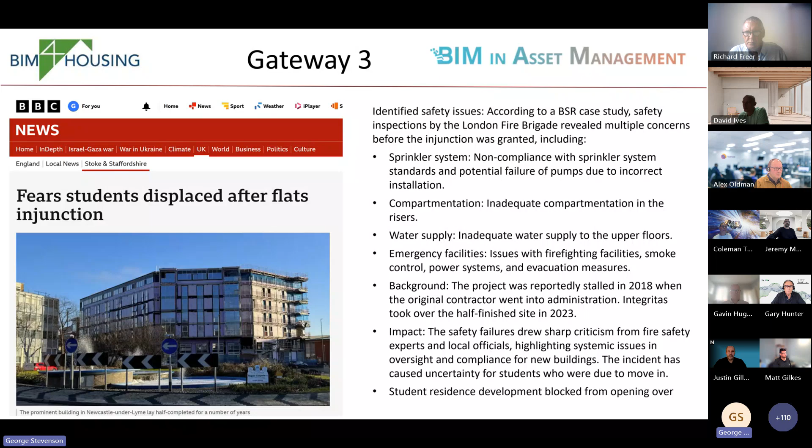If nothing else, because it's actually leading to a lot of projects being delayed because of missing or flawed information. And the Gateway 3 is even more looming. I think most people will have seen that this one is one where I imagine the finances on this are going to be very tricky.

So what we've got is BIM for Housing, but you're in a BIM in Asset Management meeting now, which is a far more focused area of the better information management process.

One of the challenges we're dealing with is that the government and the regulators haven't provided any explicit requirements for information, and they're not likely to either. So what we've got to do is rely on the industry's expertise to interpret what's needed and then recommend that to clients and supply chains.

The difficulty is that we've got different experts who interpret the guidance in different ways, and they may have different views as to what the outcomes should be. Therefore they're giving guidance to their customers, which then goes through to the supply chain, which can cause real challenges because they'll have different people saying that they need to provide different information on the same thing.

Part of the process of the Golden Thread group that we've got is to act as, if you like, an intelligent client, and to be able to produce reusable data libraries.

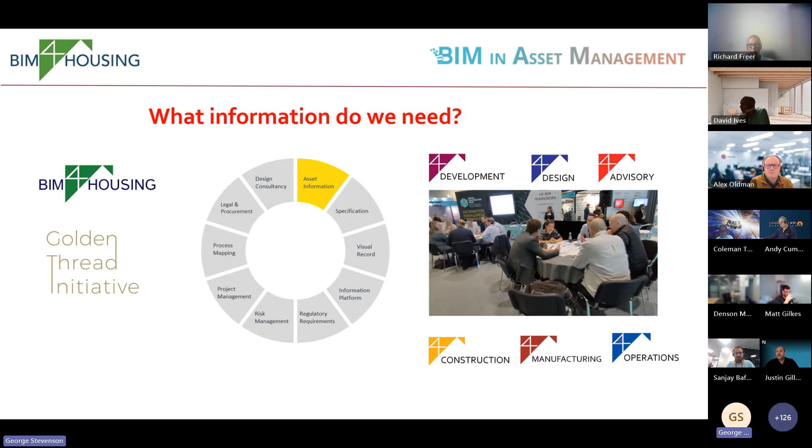We're doing them on Teams. So if you're interested in that, then please put safety critical assets down in the chat and we'll let you know about what's happening there.

What came out from that work was different stakeholders need different information for different purposes. So what we've done is gather together as much information as we could from those experts, and we've published it on the BIM for Housing website. We've got detailed information on a dozen or so safety critical assets.

One of the things we agreed yesterday is we're going to do one on lifts next. So if anybody's interested in lifts, there's going to be a working group or work stream set up for lifts over the next few weeks.

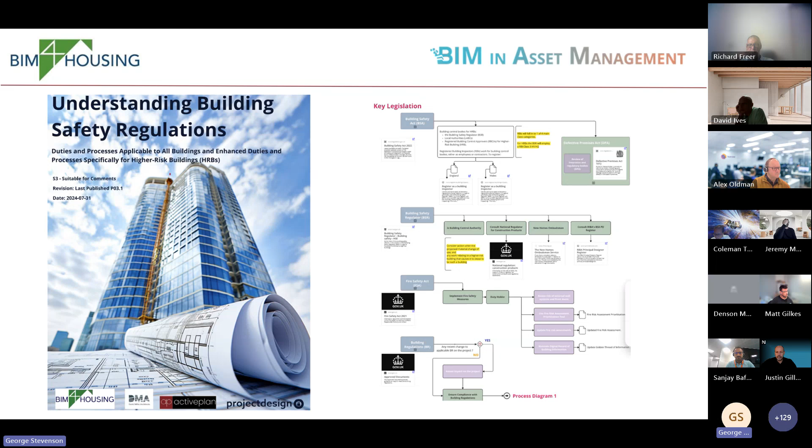What we've also got is a Miro board where a few of the team have put this together. They've looked at their interpretation collaboratively of the legislation, and you can access it there. If you aren't on that list, just put Miro board into the chat and we'll get you on it, we'll give you access to it.

We've also got some specific work streams that have been looking at, for example, something very focused like fire door inspections.

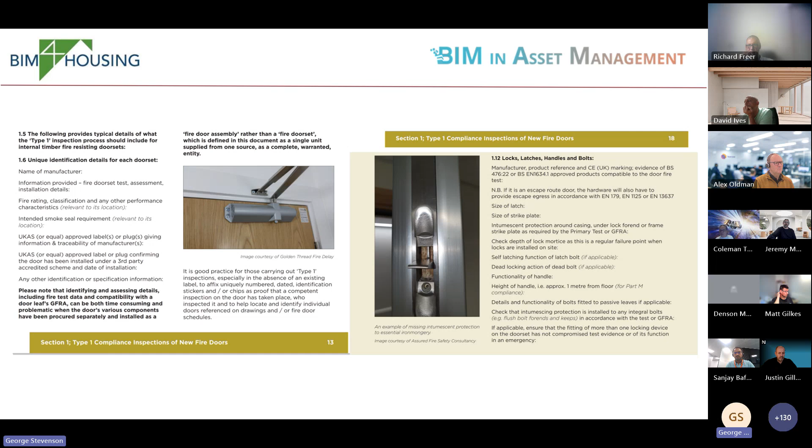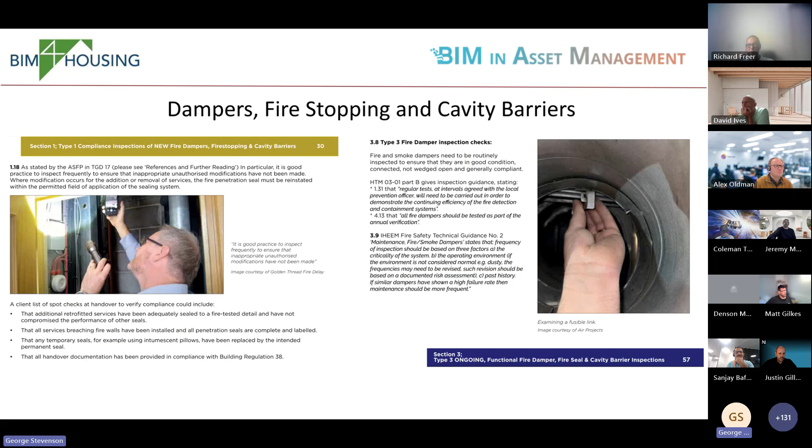And we've built on stuff that came out of the NHS, and we think it's quite a good guidance document. And we're just releasing one on fire dampers and fire stopping, which is of a similar sort of quality. We're doing that with a company called Golden Thread Fire Delay, who have authored a lot of this stuff. And importantly, we've got lots of different software companies involved in the community. What we really want to do is to get those glued together so that we've got something that's all sort of joined up.

So I'll hand back to you, Richard, on that. You're on mute, Richard.

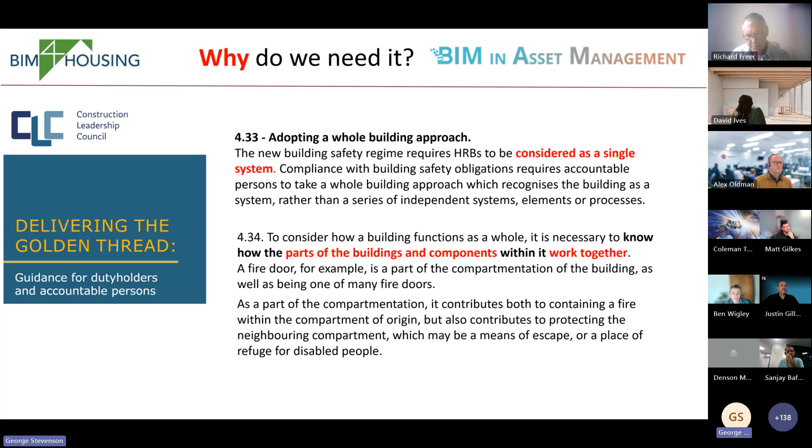And understanding needs. So, for example, having a common way of interpreting what the golden thread actually means. One of the key things that we've identified from the experts is that you really need to look at the building as a complete system, made up of lots of systems, and they all need to be able to work together. So I won't apologize for the fact that I'm showing this many times because I think it's important that we get this over.

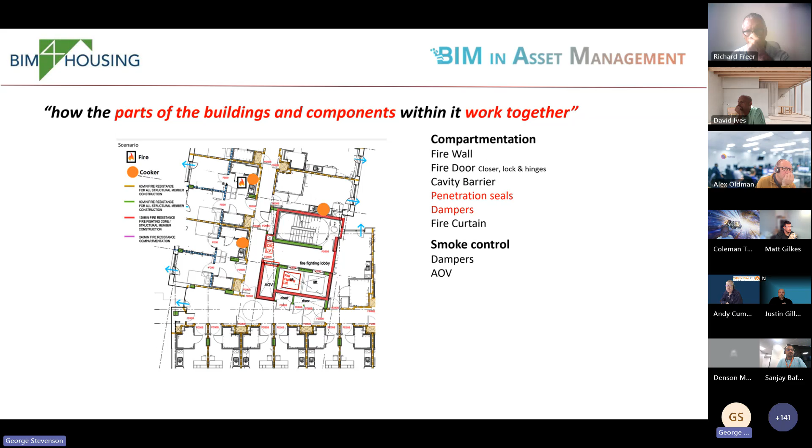That if a fire breaks out in a kitchen, we need to ensure that the smoke that maybe is generated from that doesn't get into that stairwell. And the way in which that's done is through good quality compartmentation, which means not just whether the fire doors are good, but also the whole of the compartment needs to be robust. So, if, for example, penetration seals aren't robust and in place, then you may as well not have bothered. So we've got smoke control systems, detection systems, and all of those need to be able to work together.

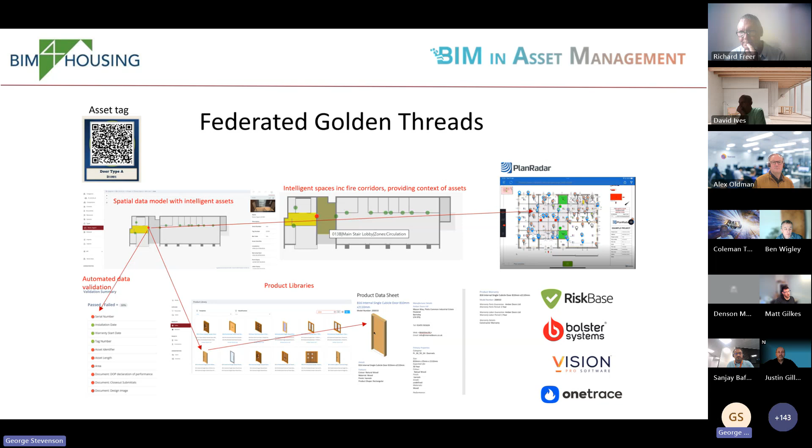So from a software point of view, we need to make sure that if there's a BIM model, the information that's come through from that in terms of what's actually been installed, what product's been installed, and also what's that door doing, it's part of a compartment. And then if there's a range of different software applications being used to do inspections, rather than just recording the inspection, we need it to tie back to the individual asset. So we can make sure that it's all coherent. And the various different software companies are now working with us to achieve that goal.

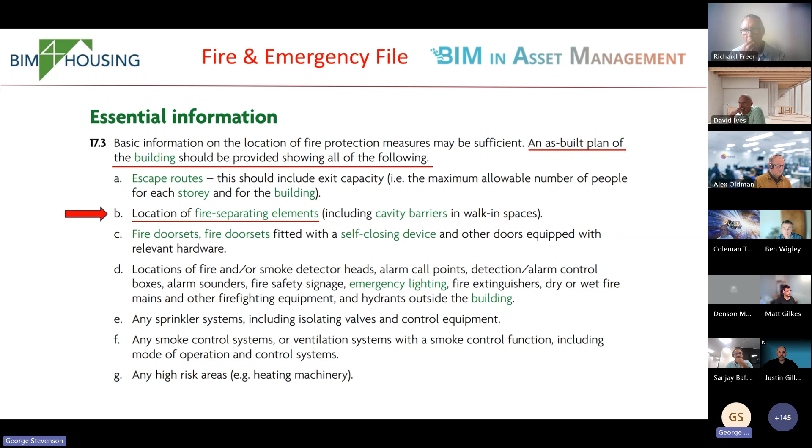What's often also the case is that clients don't understand fully what their responsibilities are under the fire and emergency file. So, for example, we need to ensure that they understand, and this is part of an educational exercise, I think, that they need to have a plan that indicates where all of the fire critical assets are.

And also, there's now a duty, a legal requirement that's actually been around for a long time, but it's now being more rigorously questioned and enforced, that a client needs to be able to say that they've got all the information that they need at handover to keep the building safe. And the same with the contractors. The contractors have to guarantee that they've provided all that information. Now, the irony with that is that it's probably coming from half a dozen different sources, and it may not be glued together.

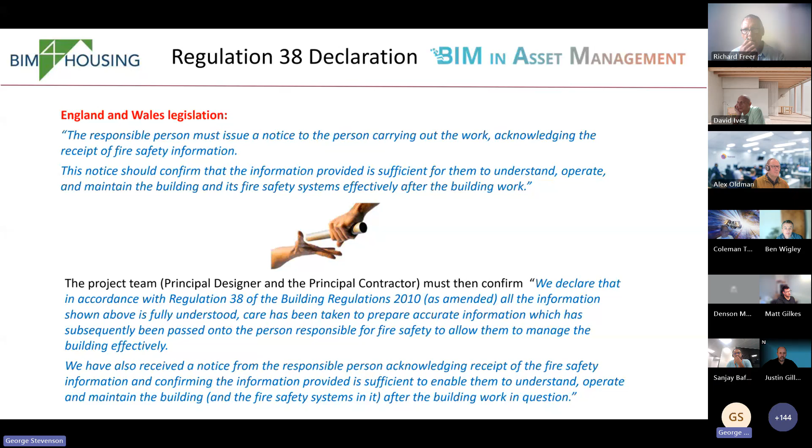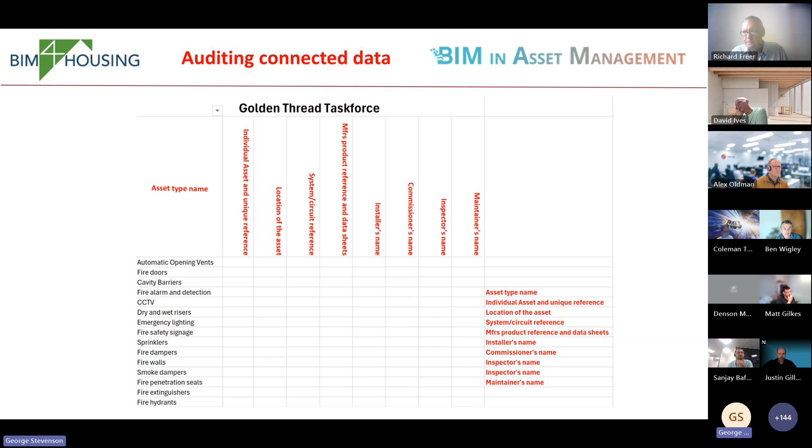So that's the sort of thing that we're trying to work to. And we've come up with this way of maybe doing a simple check to make sure that you've got the right information just at a basic level of what the asset is, which system it's part of, what it's doing, what product's been used. So this is one example of that, because what we're trying to do with the Golden Thread Task Force is have evidence of, bring together things that work.

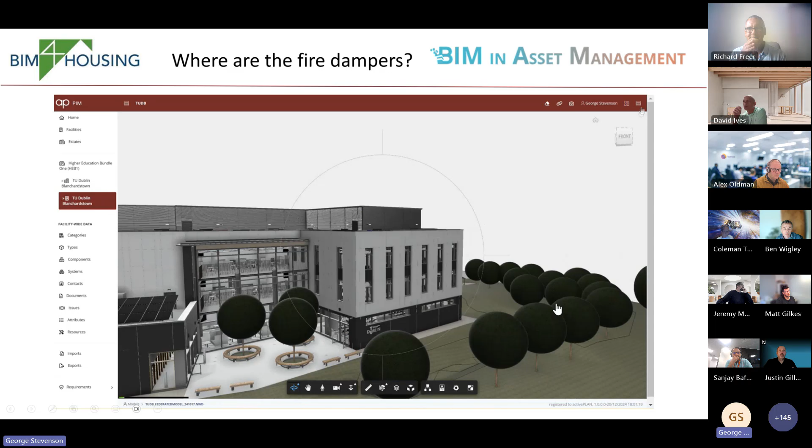So this, for example, the fire damper: if there's a fire, this duct, I understand, could collapse, and unless there's a breakaway joint, it could pull that out of the wall. So what we're doing here, we've got a range of different software applications all glued together. And therefore, what we're doing is tying together the locational information, also the product information, the installation information, so that that can be validated and checked in a more joined up way.

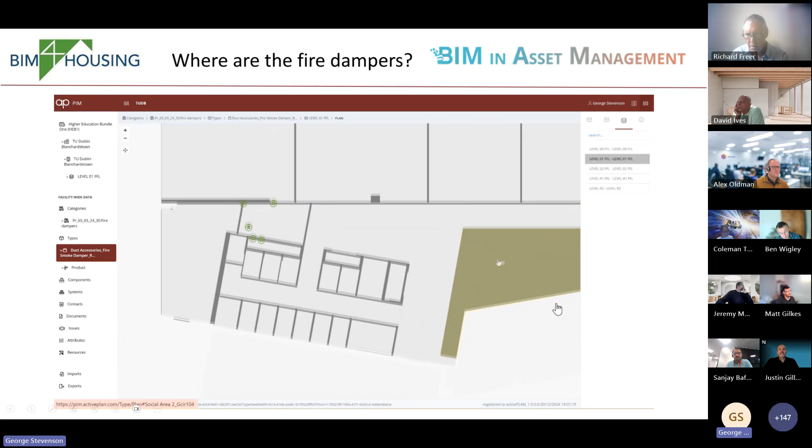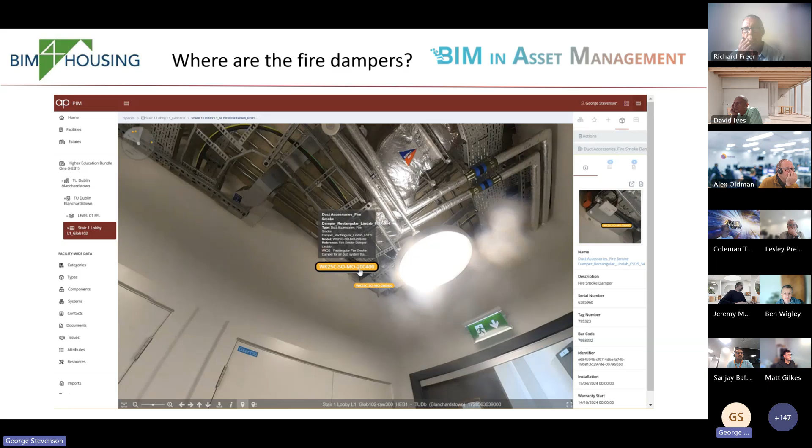So this is one example of a golden thread working between a range of different software applications and also service providers. So in this particular case, we've got the dampers located in the wall, so you can see which wall they're in. The wall can be checked to make sure it's got the right status, it's the right substrate for that particular damper. But also the 360 photographs can then automatically take you to that particular asset. And it's that sort of joined up work that we think is going to make a real difference.

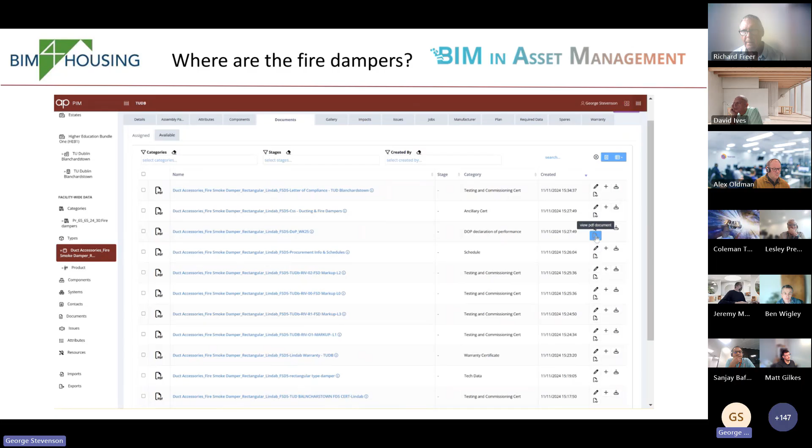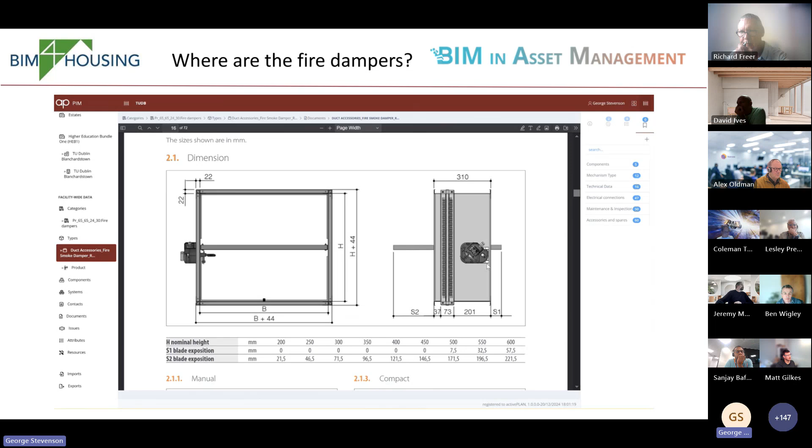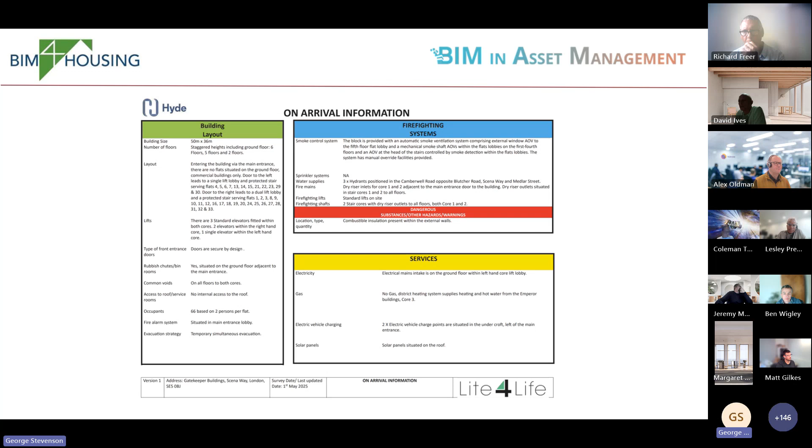And finally, this is also connecting back to the documentation. So part of the golden thread is obviously information about the specification and the product information, but also a lot of information can get buried in documents. There's also some good examples here that we're collecting that people are doing. So there's now a requirement, as well as the secure information box, there's a need for an emergency response plan. So this is one example of that, where a company called Lite4Life have been doing this for their clients. So this is the information that is being presented, which I think is particularly strong from that point of view.

And what we're then doing is moving on to collaborative projects. So what we want to do is encourage people to bring together the information that they've got on existing projects. So here, for example, gathering together all the Regulation 38 documentation, spatial models, and then maybe, if appropriate, bring in digital twins, but don't start with the digital twin, start with the basics.

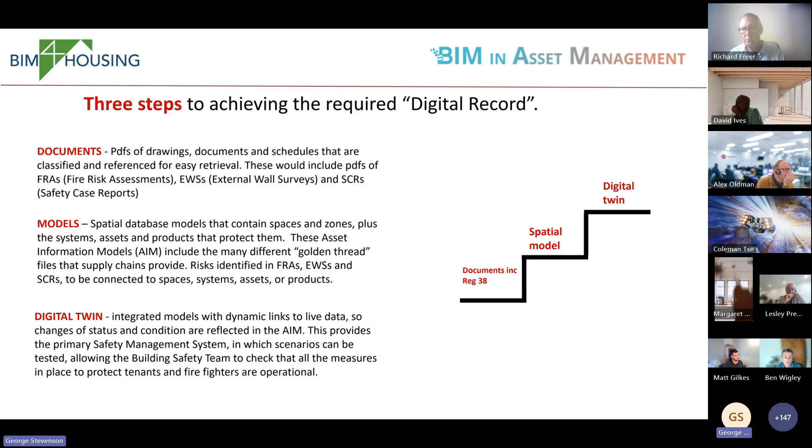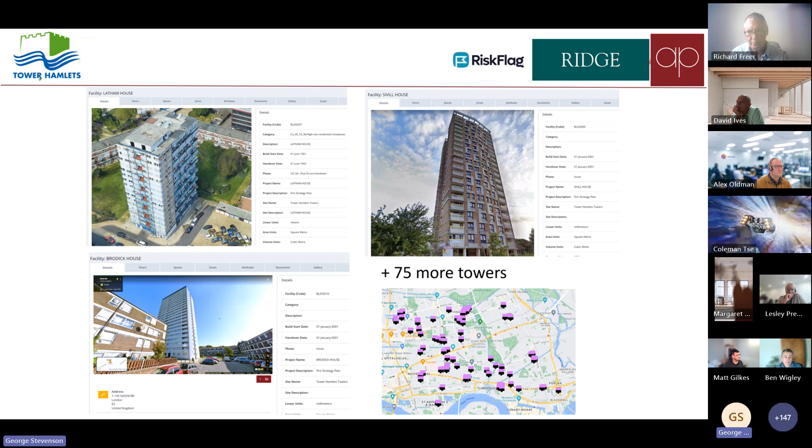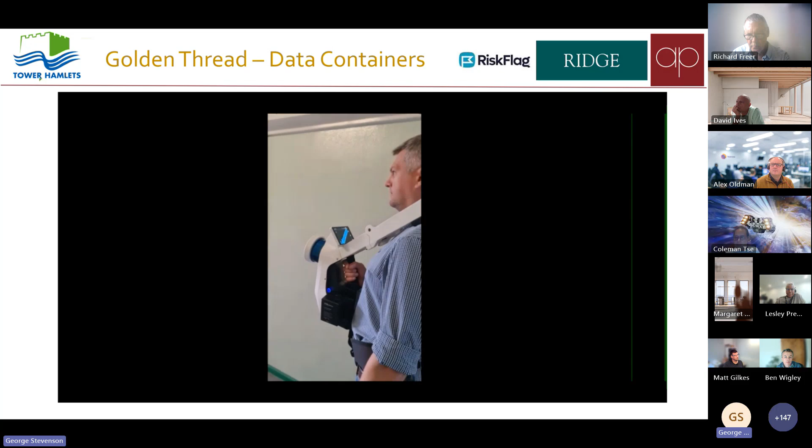This is one that Ridge are leading on at the moment. This is for Tower Hamlets, and they're doing scans of the buildings using LiDAR. This is taking a couple of years to achieve, and there's probably another 12 months to go with it. But they've got a plan, and within the budget that the council can afford, it means that they're able to do this in a gradual way, and then use that to actually go and identify, for example, where the compartments are, and also what assets are in place that are actually managing that process.

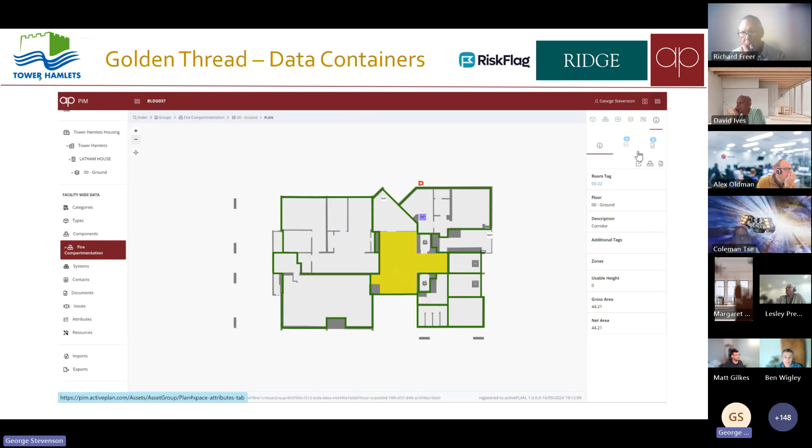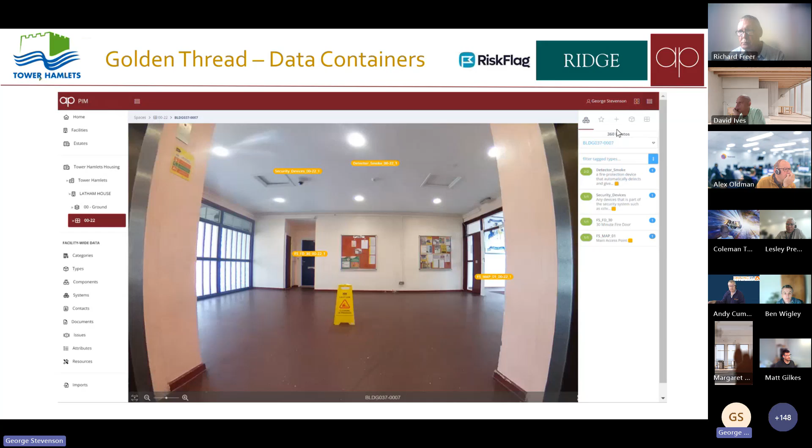So the use of 360 photographs is a good way for us to work collaboratively and open this out to the wider market of experts and get experts to actually provide that information. So in this case, in this lobby area, it means that you can have maybe a specialist in lifts. I think we're going to have several of those joining the group now. So it means that we've got that as an asset list that everybody can work to. And the next project that we're doing with them

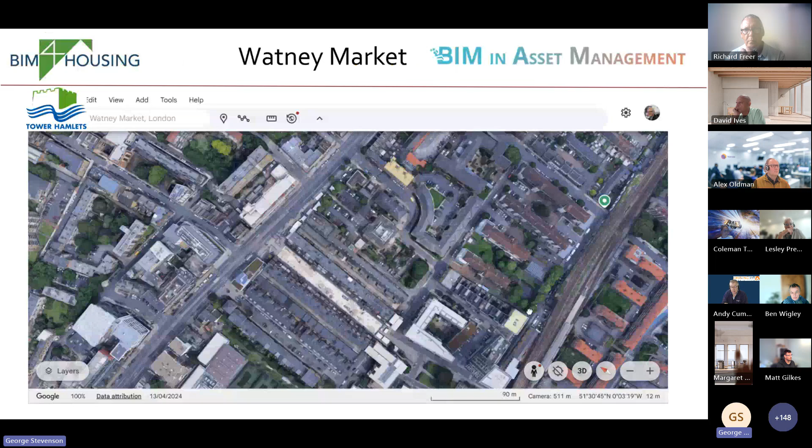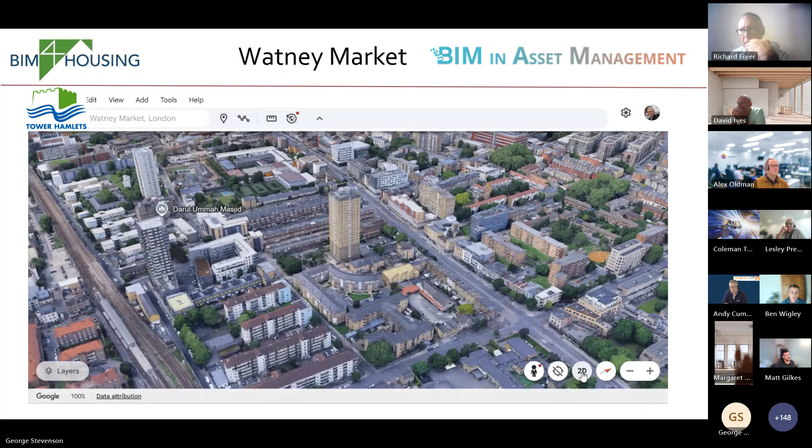This is Watney Market, which I'm going to get Barry just to say a few words about. This is Watney Market, which is a 19... Well, in fact, Barry, do you want to just speak to this for a moment? Barry's not on the call, George. Ah, okay. Can you hear me now? It's Barry. Yeah, can you hear me? I can. Oh, good. Okay.

Well, this is a project that we're working on down at Tower Hamlets, and it's almost like a worst case scenario of a brownfield site where there's an awful lot of missing documentation or documentation that's spread around. We have to consolidate all that. So we're using this particular project to try and develop a gold standard of what housing associations and the like should be asking for when they go out to commission survey documentation.

So this is a sort of, well, we're going to be using a mixture of drone footage, 360 imagery, 3D models to generate drawings. The main driver in this particular case is fire risk assessment. But of course, once you've got the 360 imagery and visual representation, or visual asset register, if you like, then you can use it for all sorts of different things. We could use it for disability access, sustainability, and lots of different disciplines can use it once you've got it.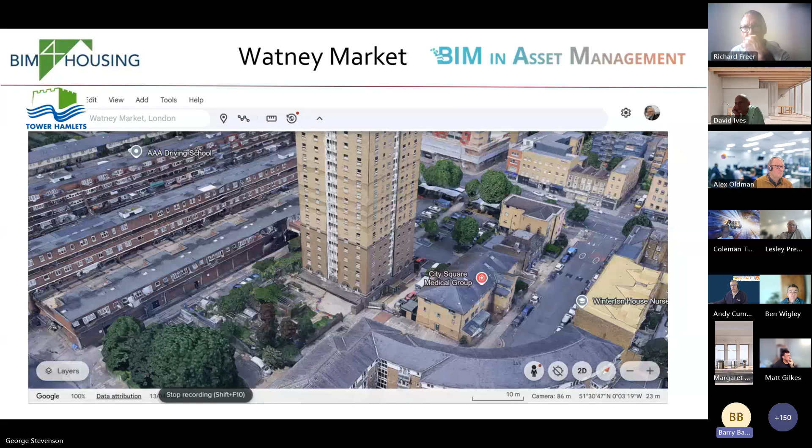In this particular case, the driver really is to do a fire risk assessment, because this is seen as one of the higher risk projects or buildings that are around. It's a market with an underground car park with a block of residential flats on the top of it. It's very complicated. So we're going to be using this as a driver to try and come up with a gold standard that hopefully people can copy and paste and use as an exemplar to see what can be done.

Some interesting things we're doing on this, like using different types of data capture, but also the idea of using common target points. So in the future, you can go back and re-establish photographs or images from the same positions that you took them from, because in many cases you're looking to see what is the degradation or changing condition, but you can't do that unless you know where the photographs are taken.

So that's what we're going to be doing over the next few months, and the idea really is to share this with the community and put it out for comments, but also to try and come up with a gold standard for any of these projects, trying to future-proof it. Does that make sense, George? Yeah, very, very much so.

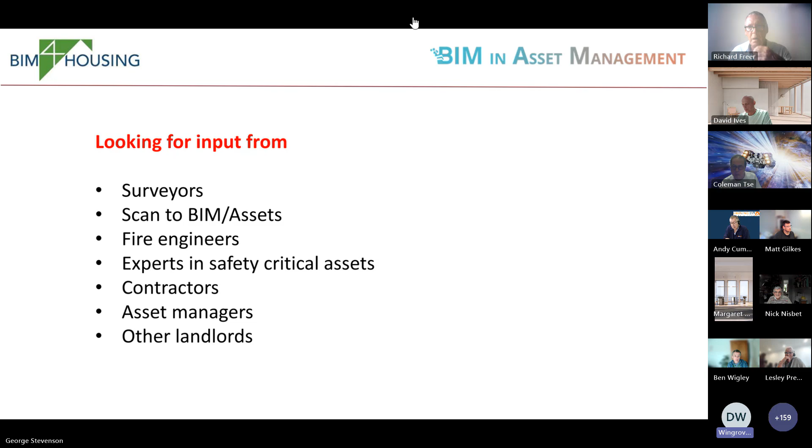I think no one's going to accept a self-certification like that. There has to be some evidence. Everything says that you have to have supporting evidence for anything.

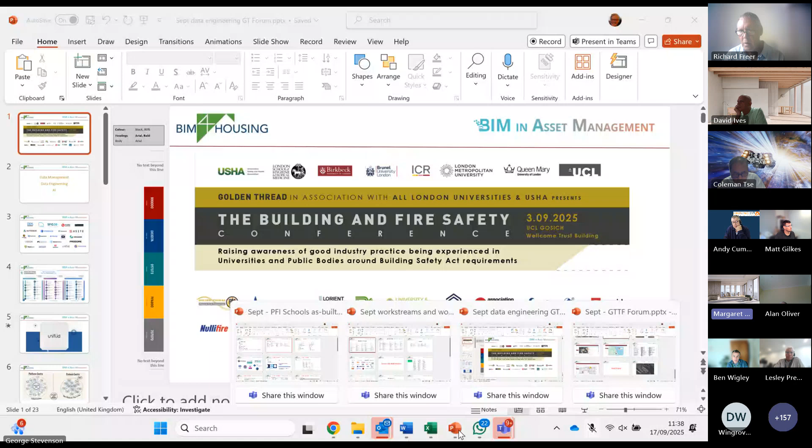confirm to George and Richard, at the conference, the London universities, in conjunction with USHA, the Universities Safety and Health Association, all safety advisors across all universities across the country, managed to put on this conference with the Golden Thread Task Force team, a wonderful team, plus others, and you can see the sponsors. We were really pleased that George was able to bring the experience from this forum into this conference, because it was all about practical aspects, and of course surveys, trying to get the strength of feeling of the industry on the whole issue of golden thread.

I'm a civil engineer by background, and safety practitioner, fellow of the Association for Project Safety. I also chair the Institution of Civil Engineers Health and Safety community, and it's changing now into an advisory group. But the main thing is, in the university where I sit, we've got lots of term contractors, consultants, our in-house DLO and so on. And we all have to grapple with the Building Safety Act to various degrees. We've got appointed persons, all sorts of people, and we all have to grapple with requirements. But the golden thread is so dear to my heart.

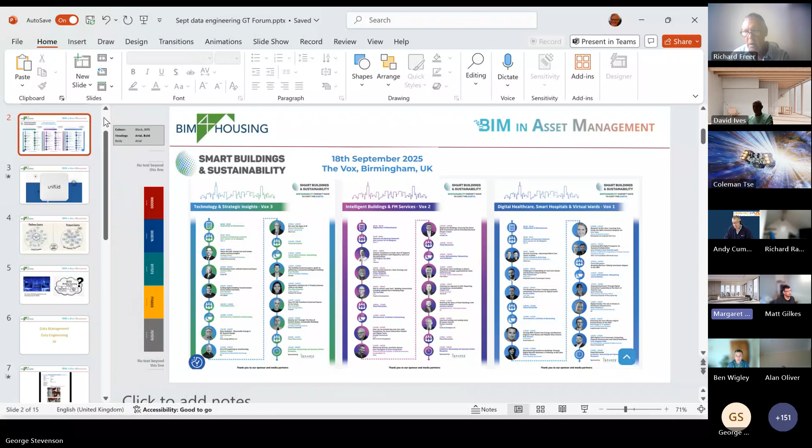The main thing is that the information we get from our projects - the drawings, the fire risk assessment, the residual hazards from the health and safety file - needs to be used in maintenance and operation. We have two examples in UCL: in Dagenham, a great award-winning net zero building, we've actually got a BIM model where the hazards are identified, and those hazards are used not only by the maintenance and operations team and the external company, but also by the users of the building, because the building is there for research. They put all sorts of equipment into the building and test it for transportation and other reasons. So the use of the information collated lovingly during our projects, carried into operations and maintenance, is key to making sure we don't just collate the golden thread, but we actually use it.

The Sodexo example that George was sharing just now is another one where, for goodness sake, facilities managers have got enough to do. Why don't we give them the best information we have, which should be the golden thread, and let that be used, and not just used, but kept up to date. If you tell people to keep this up to date, they'll do it, won't they? But you've got to tell them, which is why, coming back to what George said, the client is key. Myself and Nick were on the PAS 1192 Part 6 working group, and also the ISO 19650 Part 6 in terms of health and safety in BIM. All of that information has got to be used, for goodness sake, and kept up to date. It's a challenge, but it's not impossible, and we should be doing it.

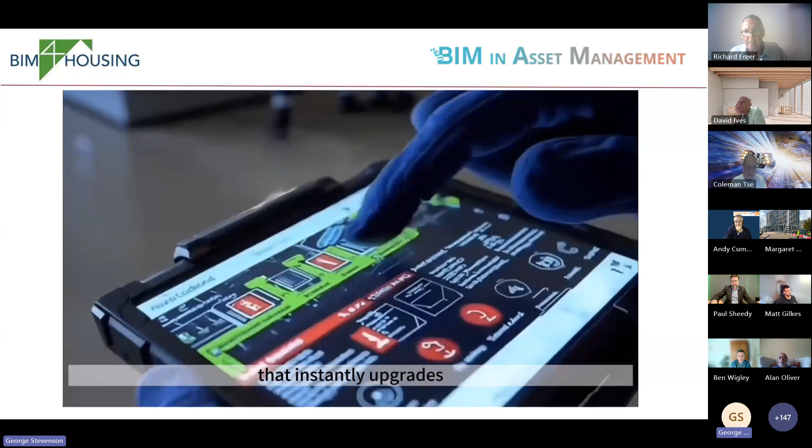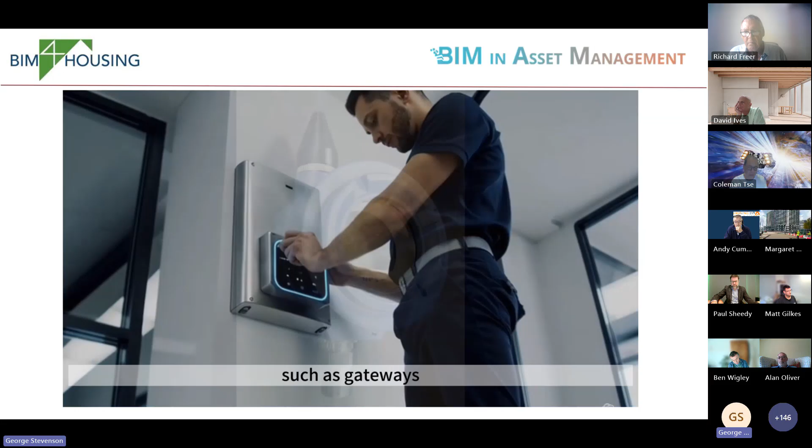In the UK, fire safety remains one of the most urgent challenges for building owners and operators. Tragic incidents have shown the pressing need for smarter, more reliable solutions, without costly large-scale replacements or disruptive reconstruction. This is the mission of FireGuard, the smart fire safety solution developed by Unified. The FireGuard platform from Unified integrates with all major fire alarm control panels and sensors, regardless of model or age. No need for large-scale replacements or construction, just intelligent connectivity that instantly upgrades your existing fire protection system. FireGuard by Unified is designed for simplicity. Installation is quick and efficient, requiring only a small number of additional devices such as gateways, pressure sensors, liquid level sensors, and data collectors. Deployment is fast, disruption is minimal, and costs remain fully under control.

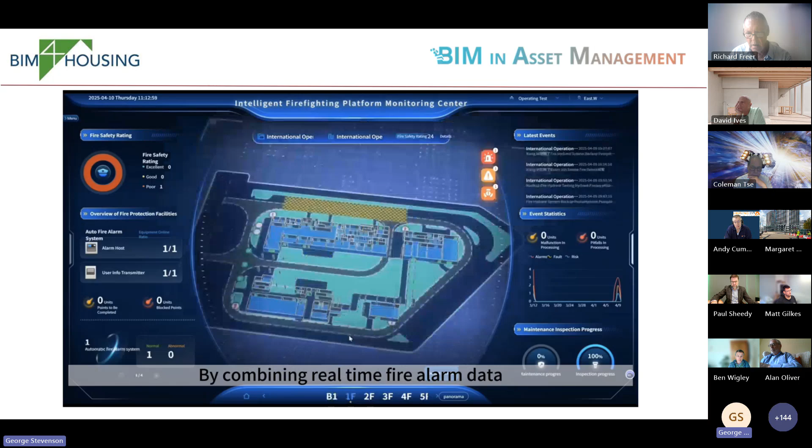With Unified's FireGuard advanced algorithms and big data analytics, our AI engine automatically recognizes building and fire system drawings to generate accurate BIM models. By combining real-time fire alarm data, facility health and operational conditions, we create a live 3D model of your building's fire safety status. The FireGuard Intelligent Assessment Model is built on 38 BSI fire standards and 17 UK fire safety regulations. Every score and recommendation is fully compliant, giving building managers clear, actionable steps for improvement.

As an independent, real-time fire risk assessment platform, FireGuard from Unified makes fire safety fully transparent. From monitoring the effectiveness of fire protection systems to verifying the work of inspection and maintenance teams, our platform ensures hidden risks are uncovered before they turn into disasters. The technology behind Unified's FireGuard is already proven internationally. With live deployments abroad, our platform has demonstrated reliability and adaptability across diverse building types and regulatory environments.

And you save money by having lower premiums. So already overseas, we've had the likes of the biggest insurance company in the world, Ping An, jump on board with this, Pacific and CIPC. And now we're working in the UK to try and get the likes of AXA, Aviva, Allianz, etc., to realize that on the major buildings we're doing, so universities, high-rise risk buildings, the data is there in real time.

The other thing we focus on is the real-time evacuation of people. This is where I feel we're really missing a trick. I'm on the 39th floor of a building right now, and literally there is no data to say I'm here. So should anything go wrong at this moment, there's literally nothing showing this entire building of who is in, on what floor, how many disabled people, etc.

We need to change all this and get to a stage where not only is the building being monitored and you know what has to be done and when, you know what's broken, how long it's taken to fix, what has to be done next in terms of checks.

But in that one-off, these black swan events, you have what's going to happen in a digital twin, how the evacuation's happening, and the fire service, whether it's up in Burnley or London or anywhere else, know what they are looking at. They have a transparent view of the digital twin.

They know where people with mobility issues are. They know how fast the evacuation is happening. They know whether they should go in or whether they should stay out and let the building evacuate rapidly before they go in. This is what we're trying to bring.

We're trying to bring this digitalization, this insight to really deliver what we call, as I said before, data-driven risk reduction. And I think it's time we all collaborated and take our various pieces and get into bed together and make a big change. This isn't a step change, this is a fundamental digitalization of where we need to go, in my view.

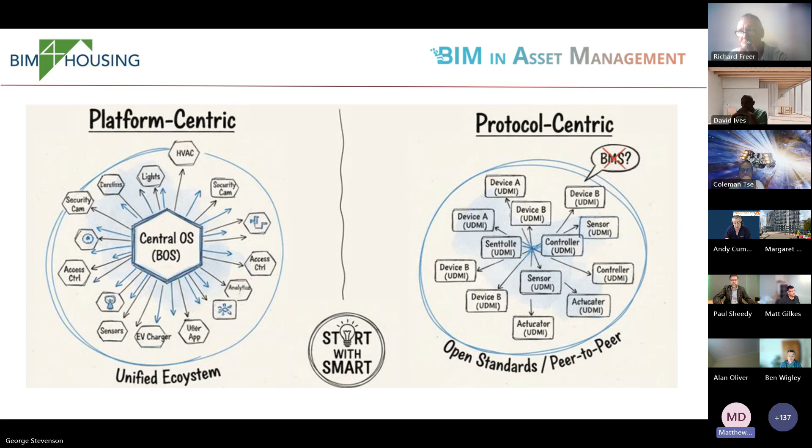But would you like to just explain what Trigger does just for a moment, please, Matt? Yeah, of course, I can give you a very, very brief intro. Trigger is a building operating system or middleware. I think the description is still up for discussion, according to the Start with Smart group at the moment. But yeah, so Trigger basically is a digital layer.

So we have created a conceptual meta language, if you like, or translation language, which will talk to any hardware, software, or IoT, old or new. And so the conversation around BIM is from a point of view of supplying the data from every single different device. Now we're hardware agnostic, obviously. So we have no capex cost at all.

We come in, like I said, as a digital layer, and what we look to do is sync with BIM bidirectionally, so that any changes to your BIM model will be updated straight away into your building, and the way we read devices, how we understand those devices and where those devices are, and then give you the data back relating to how those are working, if they're working, if there are any potential faults, and then we can link also directly to CAFM systems and to front-end tenant engagement apps and things like that.

So we work on the occupier side as well, from the point of view of an operational frictionless workplace environment. But our idea is to make sure that it doesn't matter what you have in the building or how old a building is. All of the data is completely understandable and actionable, because we're also able to, using AI and scenario-based design, create scenarios so that the building operates depending on changes in its environment internally and externally, whether that be occupancy, whether that be the temperature, whatever it is, basically.

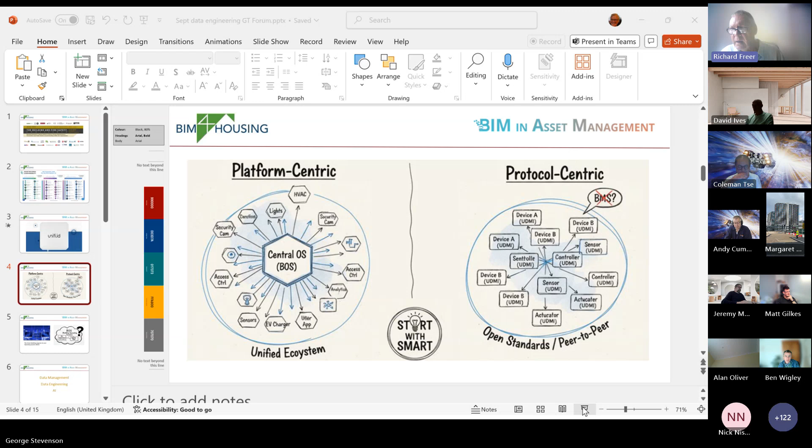Yes, I agree with the fact that we have all these platforms which create digital twins to monitor the data. But the important aspect is that the information that you get at handover is what is going to go into these smart building apps. And if that information is not streamlined, then that's not quite appropriate to feed back into those digital twins. So that's what I am focusing on.

Concern is that sometimes the designers and subcontractors often run into scope gap issues regarding who should provide this fire safety data. For instance, even for builders' voids, it is important to know which fire stopping element has been proposed in those locations. But sometimes it just goes down to: is it the responsibility of the M&E contractor or the architectural designer? So that's something that we need in this industry to resolve, basically. Okay, cool. I think we can all agree with that.

Margaret. Yeah, I just wanted to contribute to that because I put a response to Arthur in the chat. You see how we're seeking to adopt the Power App tools that I think have been presented here before. George knows about the tool Building Safe. If you go to their website, they've got tools there. There are other tools, I know. The responsibility is on the designer that did that design to provide the evidence and make it available to the client. That information should be part of the client's employer's requirements, the project execution plan, and the contract documents.

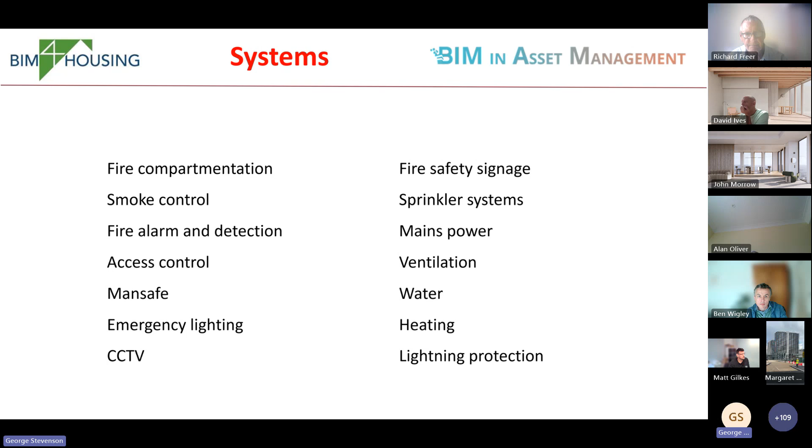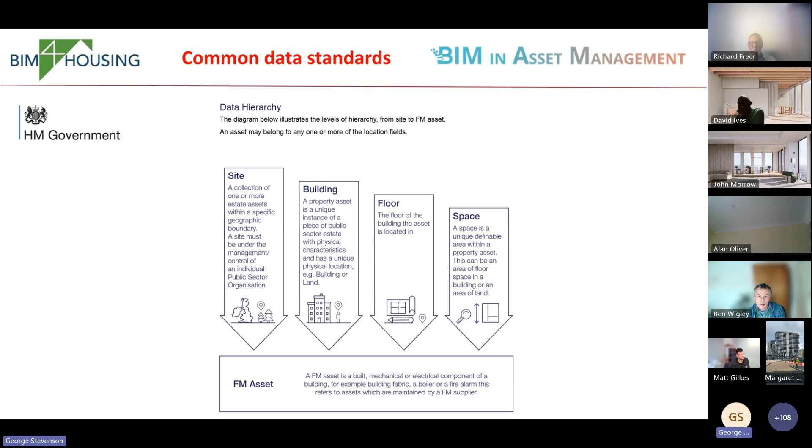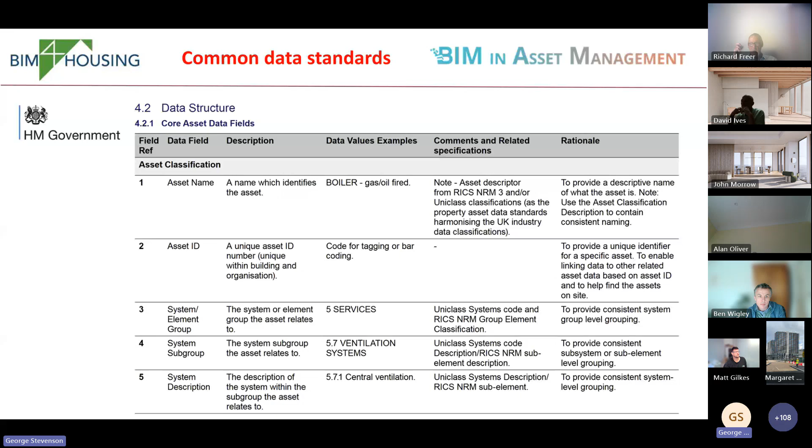A lot of what we're doing is revolving around what systems need to be demonstrated that are performing. And there's obviously a range of different standards that people are working to. Matt's point is that we need to embrace these standards and apply them to the government standards, which the Cabinet Office is leading. The FMS 002, for example, is a standardized way of asset data being described. So rather than every client setting up their own systems, this is a proper hierarchy, and therefore it's going to make it a lot easier for software applications to plug and play into the right sort of data. It means we've got something far more easily connectable that can also be searched by AI tools, for example.

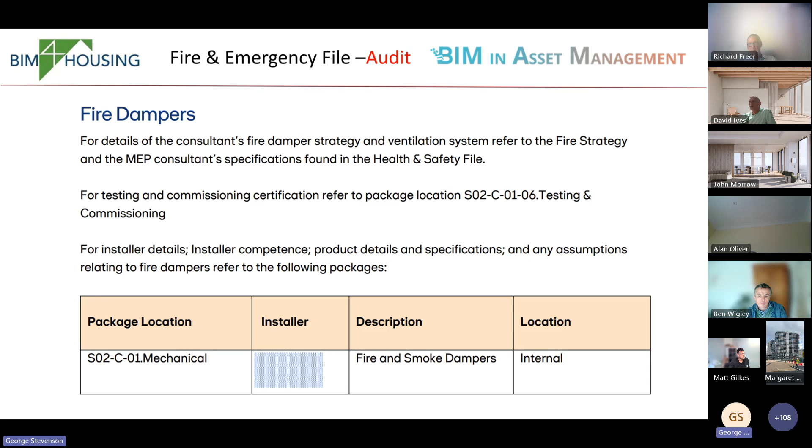So what we're really looking to do is to make this so that we can then pull this information together. And schools, for example, is a key area that we're working on. We've got a group of people that are delivering schools, rather, working collaboratively to try and improve the quality of handover information to the caretakers and managers within the schools themselves.

So if you are involved in either delivering or designing or even managing schools, and you're interested in becoming involved in this, pop your name in the chat. We've got quite a strong group together on it, and then we can bring that through. So I'm going to hand over to Barry because findability is an important part of what we're doing. So do you want to just cover that, Barry?

Yeah, sure. I'll share my screen. Hold on. Hi guys, how you doing? I'll just share my screen. Hold on. Bear with me one second. I've got the wrong one. Hold on. Can you see a slides thing there, guys? Yeah, can. Okay, thank you. Yeah, I'm just trying to jiggle around with one screen where I am at the moment.